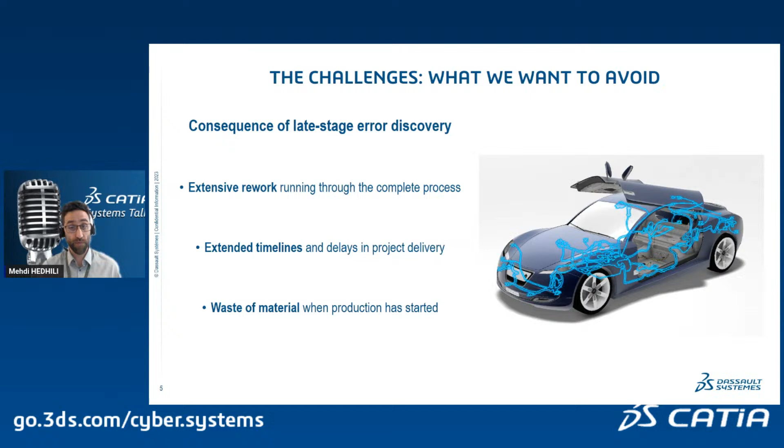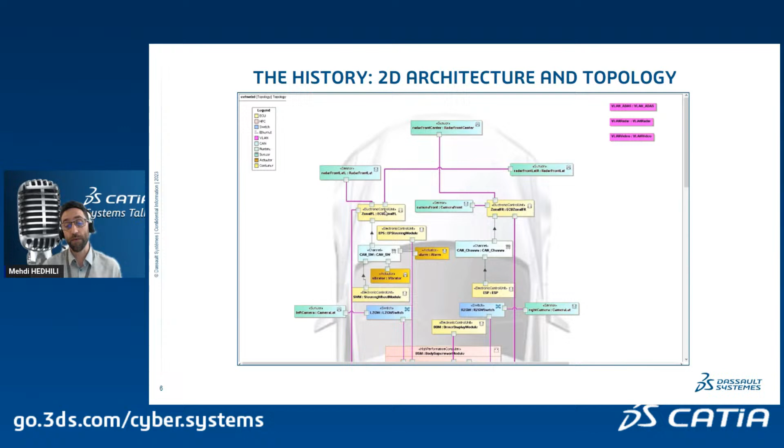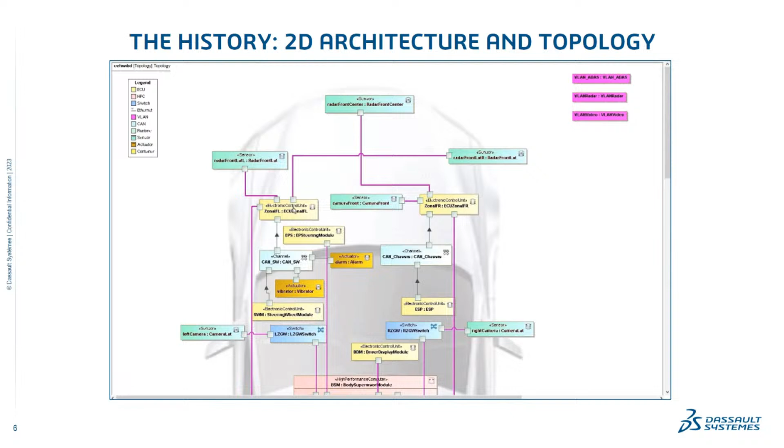That's nice and all, but this is lacking a lot of crucial information, the length, the actual position of the equipment, or any other system that can interfere with that one. So by building this collaborative architecture mockup, we will be able to solve this kind of problem and avoid that in different manners. The first thing is that it's collaborative. So we will consider in the same space reservation, electrical, fluid, communication, waveguides, HVAC, whatever system, and we will approach that in a holistic manner, making sure that they don't interfere with each other.

The key benefits we expect from using this 3D architecture mockup are to have an accurate design approximation from the beginning, to be used with simulation and analysis, anticipate the installation to make sure that we are ready for certification, respecting safety requirements from the early stage of development, and be able to already compare key performance indicators to do trade-offs and select the right solution the first time. To finish, one important benefit is that this basic mockup will help us assist and automate the downstream 3D design, and we will see in a minute how we do so.

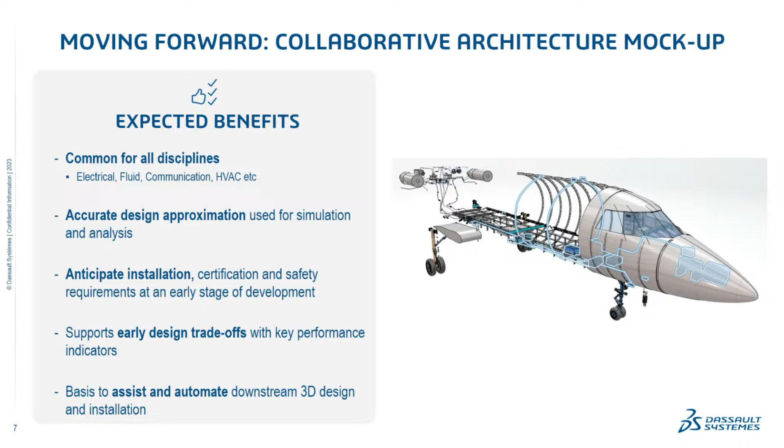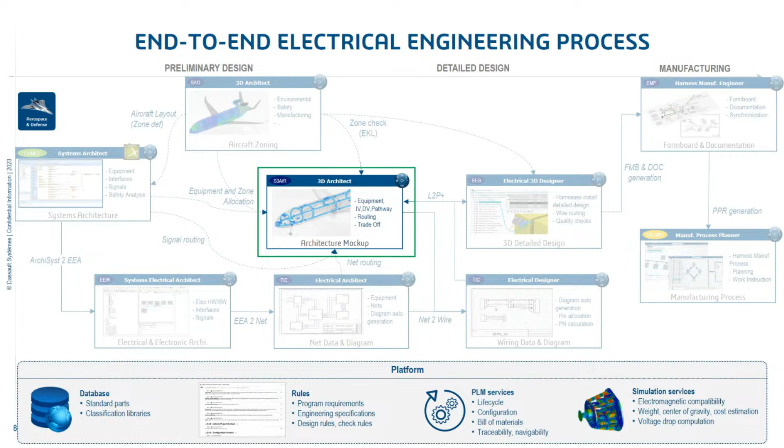So CATIA 3D Experience is proposing a lot of roles to fulfill this complete process, and the one we are interested in is a cornerstone, 3D architect, right here in the middle of this process. The concept is actually quite simple.

We have a system architecture, very rough, very basic, hardware elements. We know that we need a motor, a pump, a calculator, a lamp, whatever. And we have signals traveling between them. And when I talk signals here, it's high level signals like audio video, power supply, or flight control. We don't need to know the detail inside. We just need to know which pieces of equipment are exchanging these signals. And this is what we will place in 3D space reservation.

Let's go a little deeper in the general concepts that are used in this 3D architecture and see the roles and applications that are now provided for approximately a year in CATIA 3D Experience. We have created two new roles, System 3D Architect with a bunch of apps that are really the generic ones, allowing to handle the life cycle, the system finding, and these kind of things. And one main application, which is space reservation. We will see in a minute what we do with that.

And the second one is System 3D Routing Engineer that will help us do the path finding, the route for the signals inside the systems with the app System 3D Allocation. What we will do with those two roles is first create the collaborative architecture mockup, create space reservation for components, and what we call integration volumes. I will come back to that in a minute. That's what we see in blue on the right side, and create a network of pathways in which to route our signals, flows, waveguides, etc.

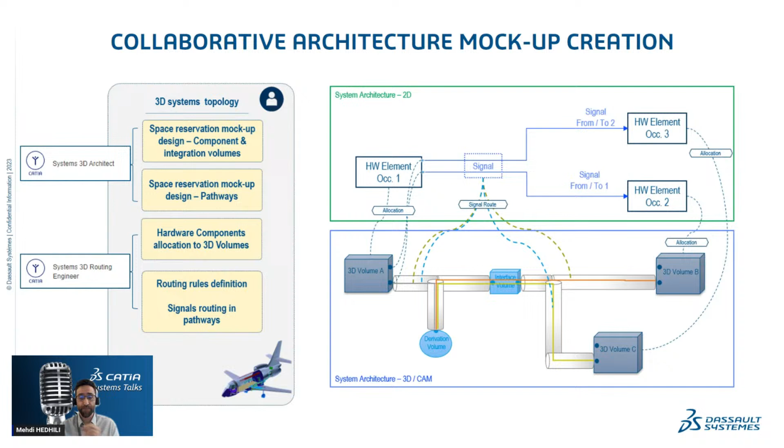So a word about these volumes. There are three types. We have the first one that is pretty straightforward. It's the component volume. I have an equipment, it's a calculator, it's a pump. I need to save some space in my architecture, my system for this component. So I create a volume and I make it big enough to host one or several of these pieces of equipment and components.

Then we have two other types of volumes, which are a little bit more specific. In the first place, they don't have any components coming from the architecture that should be placed in there. They are in prevision of the need of components to, for example, split a signal. If I have one emitter, one equipment, emitting a signal going to two pieces of equipment, B and C, I will need at some point to split my signal into two, of course. So these derivation volumes are designed to do that. This is where we will place the device that will divide the signal in two.

The third one is interface volume. That's the kind of space we reserve when we have, for example, a wall between two different zones, and we need to cut the harness in two at that location. So we will define and we will allow spaces for these interfaces anywhere that it's needed in the system, maybe because we cross, as I said, a wall, or because we need to be able to have a removable part, let's say between a seat and the rest of the car.

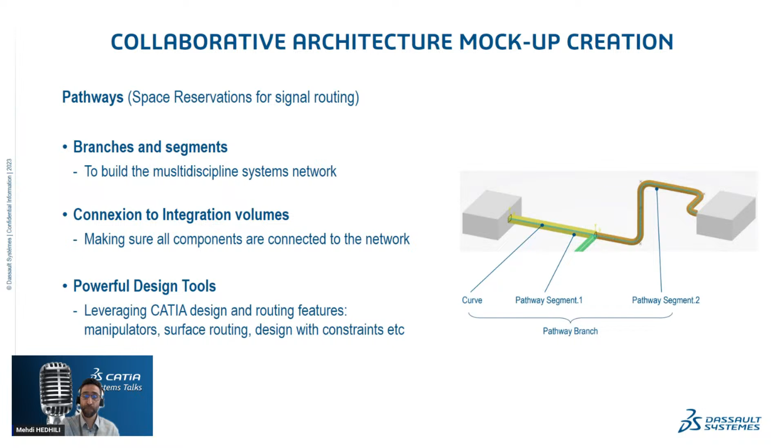So let's go a little more technical. That's where we will see a little bit how the software looks like and what are exactly the features. And we will see how first we build the architecture mockup. And so we create these volumes and these pathways. We have extensive tools to create the volume, allocate the right type, and create every connection that is needed, place them properly in the system.

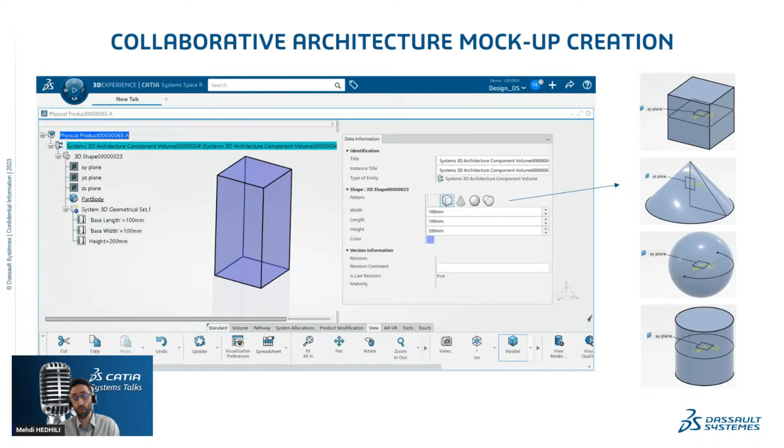The volumes are completely free. It's basically not rocket science at that point. It's about creating boxes, cubes, cones, spheres, cylinders, you name it, completely free in the creation, in the shape of these volumes. And then we will give them the proper type to identify if they will receive a piece of equipment or will have to host derivation devices or interface devices.

Of course, in those volumes, we create connection points. That's where we will come and connect the pathways, the network of space reservation to route all the routables of our different systems.

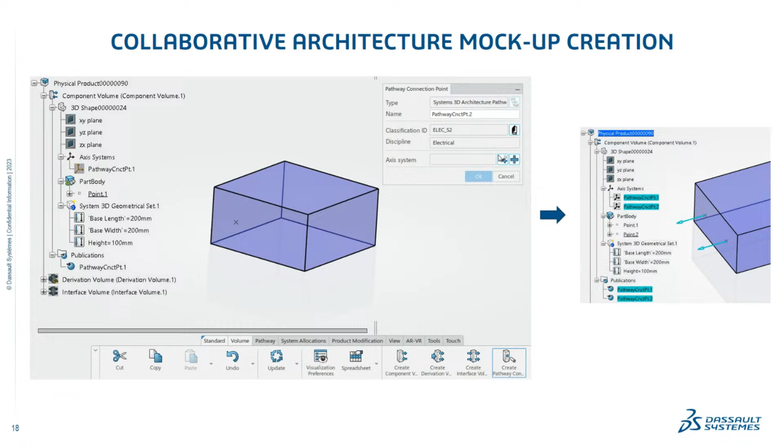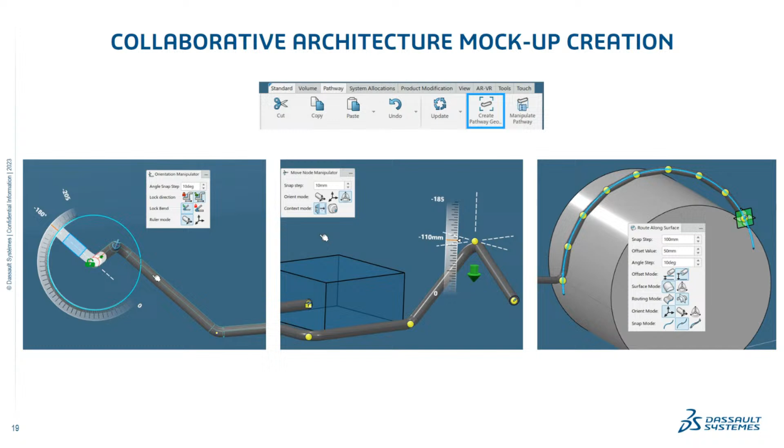And then in another section of the toolbar, we have the creation of the pathways. And here, as I quickly said earlier, we have all the tools that you can find usually in CATIA to bend, change the length, organize, connect, place, or even route along a surface, or with any kind of constraint that are available in the tool to make sure that we have the right space reservation going into the right place.

One important part of the pathways is the fact that we are able to apply some classification defined in tables on these pathways to make sure that we put the right type of signals in the right pathway. That allows us to decide if a pathway should be exclusively electrical, exclusively hydraulic, or is forbidden to a certain type of signal, or force a certain type of signal to make sure that segregation is respected,

that we don't put a high power supply next to a sensitive communication signal, creating interferences, or that a signal is not going in a danger zone for it, for example. And so when the routing will occur, we make sure that we give the right constraint to select the right path.

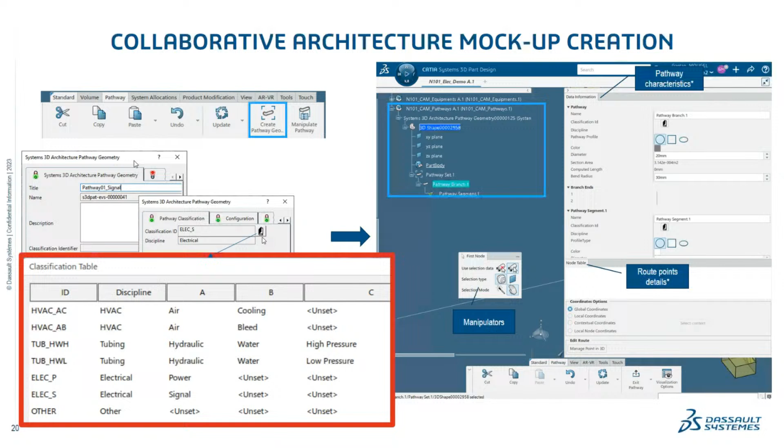Of course, in a complete system, the intricacy of the network can be way more complex than that. But here is a very short, small example to identify what are the parts available in this process.

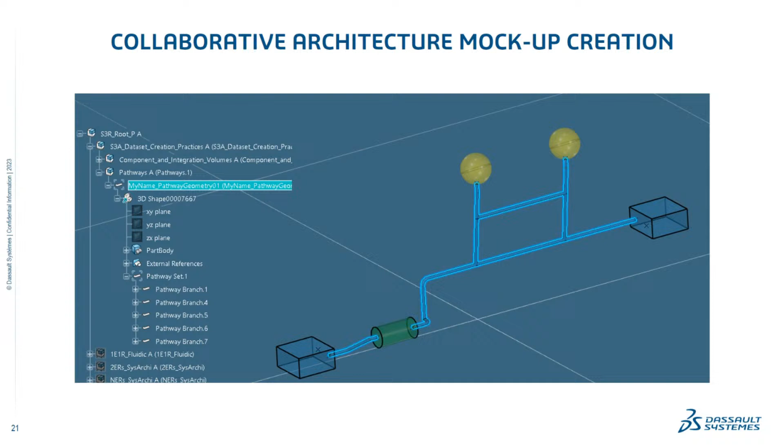So when we have that, we have space reservations. We have made sure that for any of our components, we have a dedicated space that could host it. Now, the whole point using the second role is to allocate the component to the right volume and route the signals.

So with the allocation assistant, we will have a complete list of all the components that are available in the electrical architecture, the hardware architecture that was made earlier, and we will be able to allocate them to the volume we just created. Again, this is for the pieces of equipment, for the interface and the derivation that will be automated later.

But here in a single tool, single view, we have the list of all the components we need to place, and we have the opportunity to select the right volume for them.

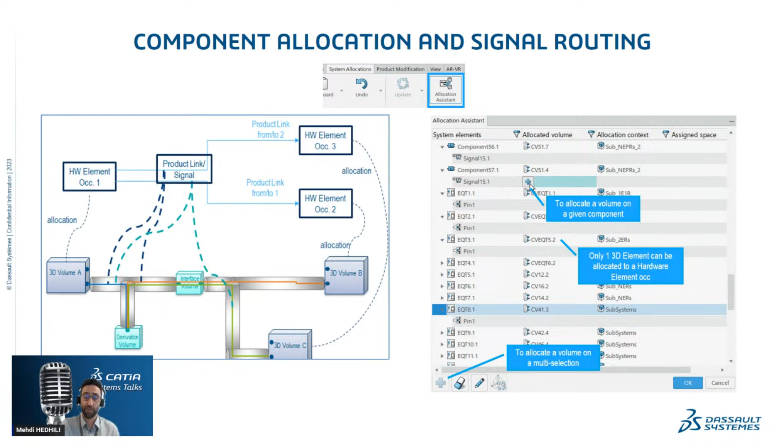Then when we go to the routing, and that is where really the strength of the whole concept is, we have a path finding algorithm that will make sure of several things. First, that all the signals that are emitted are reaching their destination. And it will also select the right path to respect segregation, to go through derivations if the signal needs to

be split, at least one derivation, and trying to optimize the length of wires by selecting the right derivation, and taking note that if we cross an interface, we will have to cut the signal there and interrupt the wires at that location.

We are also able to link different types of signals in these pathways, as we said earlier. Here we highlighted some examples like line IDs for fluids, or architecture signal, high level, or even net group equipotential. So we can route audio video as one signal, or we can divide it already into 3 different electrical signals if you want to be more precise. So we have here some flexibility.

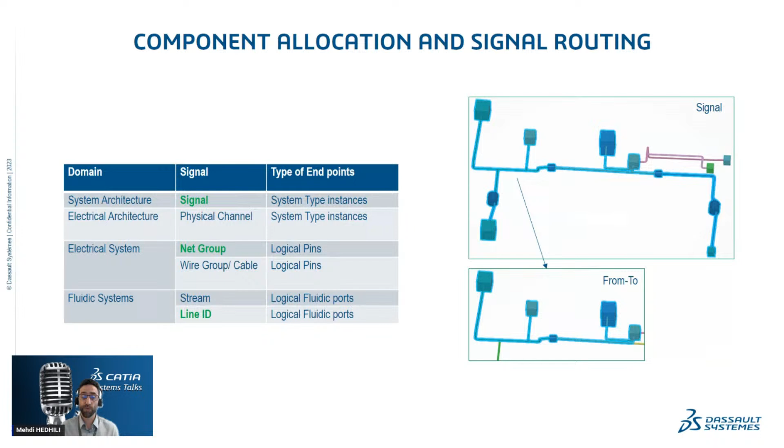As it is a complex matter, we have defined several signal patterns, going from the very simple one of one piece of equipment is emitting, another one is receiving, 1-1, very simple. But also we can handle in this routing N emitters going to P receivers and making sure that the derivation is correct, that we go through the right cut, and that every emitter and receiver is getting the signal properly.

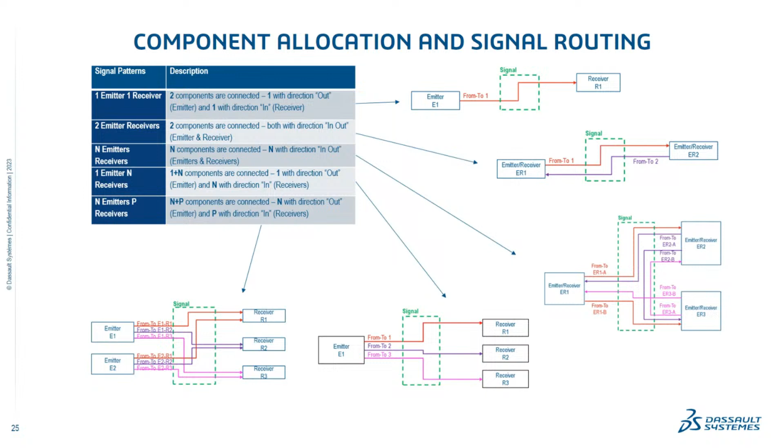To do so, we have in the tool the same kind of interface we saw earlier, signal routing assistant, which can seem a little bit intimidating sometimes, but actually it's very simple. We have one column with all the signals that were defined in the 2D architecture, and we will be able to see the signal type, the pattern we just discussed, to which they belong, and to be able to route that into the network.

First, we have source destination, and then we can run the path finding algorithm to find the exact way where we need to route these signals.

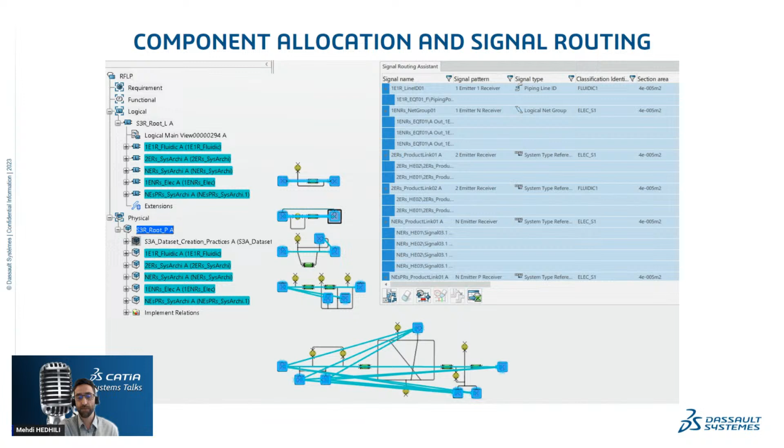At that point, we have this 3D architecture. We have all the components allocated to spaces. We have a knowledge of the route of the signals, and this is saved. For each signal, we can extract the route with the right cut, derivation, source, and destination.

And with that, I want to conclude. I want to highlight additional benefits we can get from this 3D architecture. Like, for example, the check of safety rules. We will make sure by design that we don't have environmental hazards, like an equipment that can cause an electrical spark in a fuel zone, or we can avoid routing anything through non-pressurized location zones in an aircraft, flooded zones in a submarine or a boat, or radioactive zones, etc.

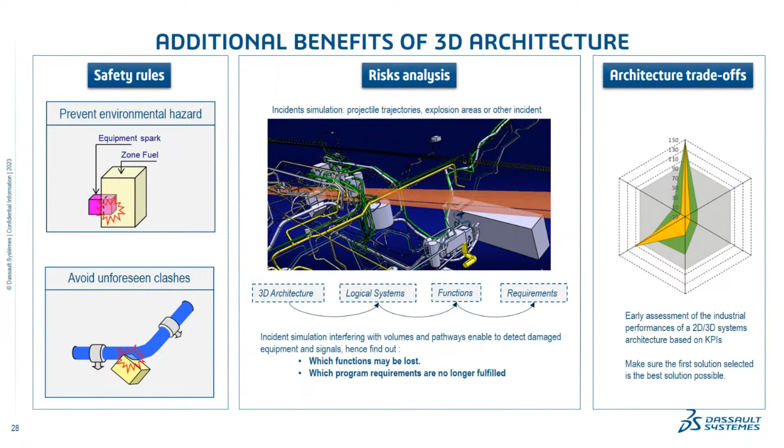We will also make sure that if there is a clash between two space reservations, we see it from the beginning. We don't risk, when we go to detailed design, to have some mechanical parts that are in the way of a routed system. We can also perform particular risk analysis. That is something very important in aeronautics.

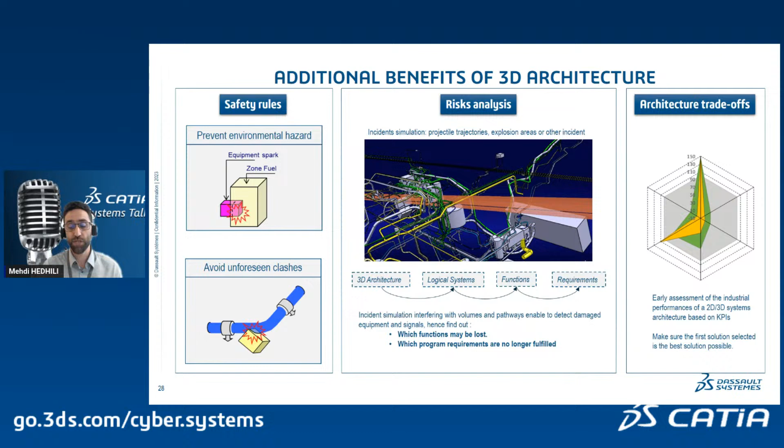If there is, for example, an incident with a motor and the part is impacting the aircraft, we can simulate that, see what pathways would be destroyed, and make sure that the most critical signals, like the flight control, for example, will not go in the danger zone and will always be routed safely. We can also perform trade-offs from the architecture, see if the solution we have devised is really the most performant, and make sure that all decisions are the best from the beginning.

And for the downstream automation, we are able to use these routes to create electrical schematics and to place the components in an assisted or even automated manner. And from this architecture mockup, when we have all the components defined in an electrical schematics, we'll be able to automate the placement of the final part, the detailed part in 3D. We will be able to place automatically in the detailed 3D mockup.

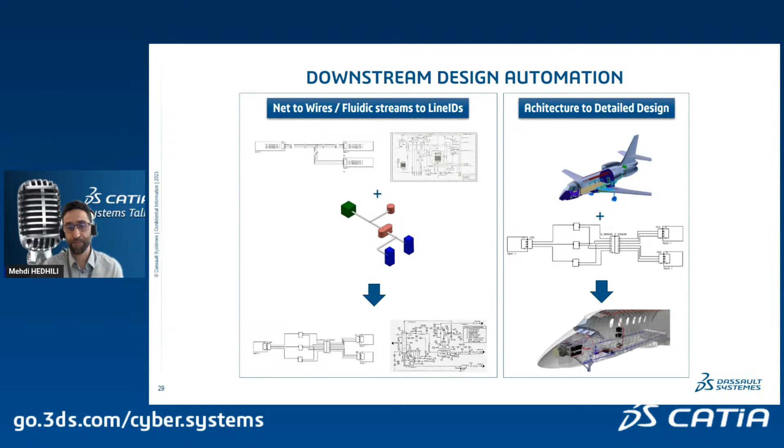So, coming to an end, I would like to highlight and remind everybody of the key takeaways I hope you will get from this presentation. What we are proposing here is to design a multidiscipline, very important, multidiscipline systems architecture in 3D to get an accurate approximation of the final product, and get it right by design, the first time. Doing so, we will avoid late-stage error discovery. We will make sure that everything was under control from the beginning. We avoid costly rework. We avoid delivery delays.

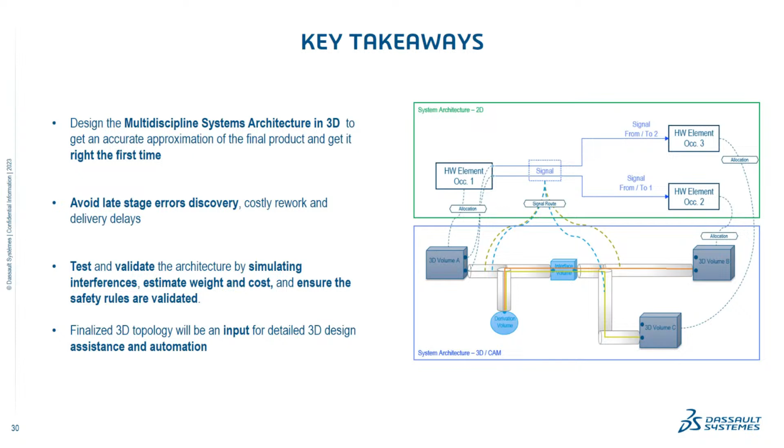We will be able to test and validate the architecture and the solution that we have decided to go with. And we will be able to simulate the interferences, even estimate weight and cost, and ensure that all the requirements for safety, certification, etc., are fulfilled. And finally, this can be used as the input for the 3D detailed design. And so all this preliminary preparation work will drive the creation of the detailed design, making sure that we have this digital continuity and that every decision is informed by the previous step.

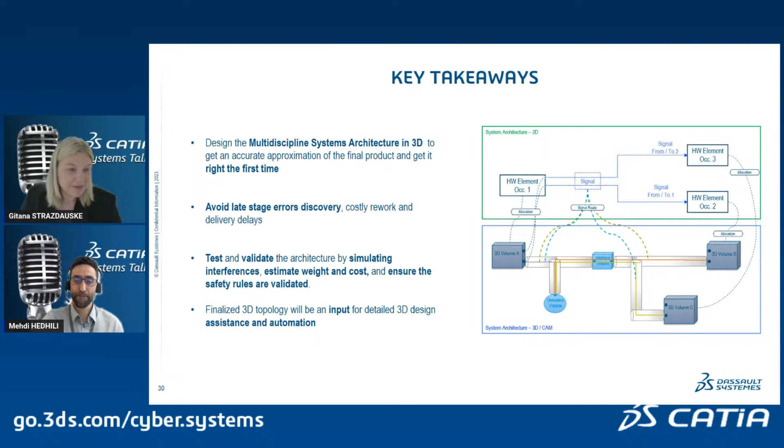I have just one question, but that's important to know. How does the solution address the needs of various industries, such as automotive, aerospace, or construction? So basically, the concept is coming from our discussions with aeronautics. They were the first to express the need of such approach.

Now, it can apply to any industry, actually. Having space reservations, that's a very universal concept. And so it can be applied just like that to probably any industry you want. Maybe there are some specifics from other industries that have not been identified yet. But anyway, this is a work in progress. We are continuing to enhance and enrich this solution, and if specific needs arise, we'll take it into consideration. But right now, we think that this solution can be applied as is to any industry, and it has already shown some good results with aeronautics and marine and offshore at least.